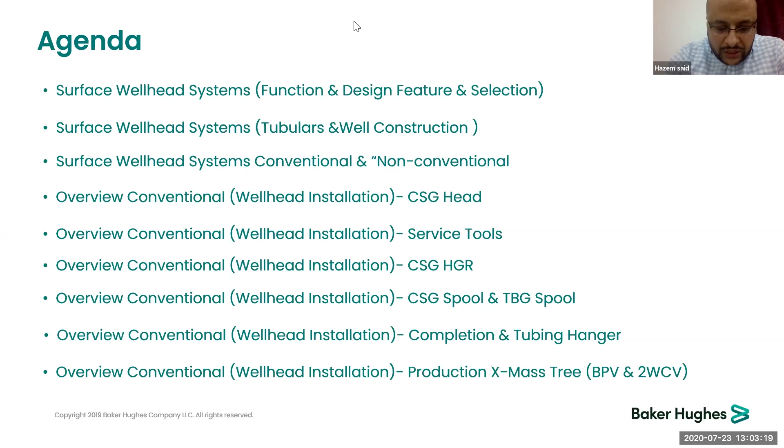So surface wellhead system function and design feature. What is surface pressure control, or what does surface wellhead mean? Or what does a surface wellhead look like? We have two main types of wellhead. We have something called surface wellhead, and we have another one called subsea wellhead. So the wellhead will be either on the surface or on the seabed.

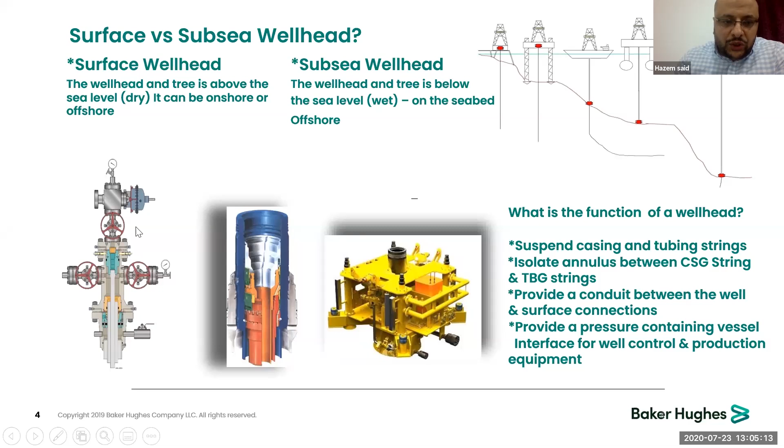What is the function of the surface wellhead? The function is to suspend the casing and provide a conduit for a surface connection, provide a pressure containing vessel for interface for control and production equipment. So this is the main function of your wellhead. This is like a door for your home. You will not be able to go inside your drilled well without passing through this wellhead. So it's your door for your home. So this is what we know about the surface wellhead.

How does this wellhead look like? The wellhead has design features. You will know this wellhead by its features. So the main design feature for a wellhead is whether it will be a flanged wellhead, like the one on the left-hand side, or a clamped connection like the one on the right-hand side. You will find a clamped wellhead part.

Whether we will find it's a slip hanger or mandrel hanger. The mandrel hanger is usually the one used in the multi-bowl wellhead. The slip type is the one used for the stacked wellhead. Even in some troubleshooting, we use this slip type hanger in the multi-bowl.

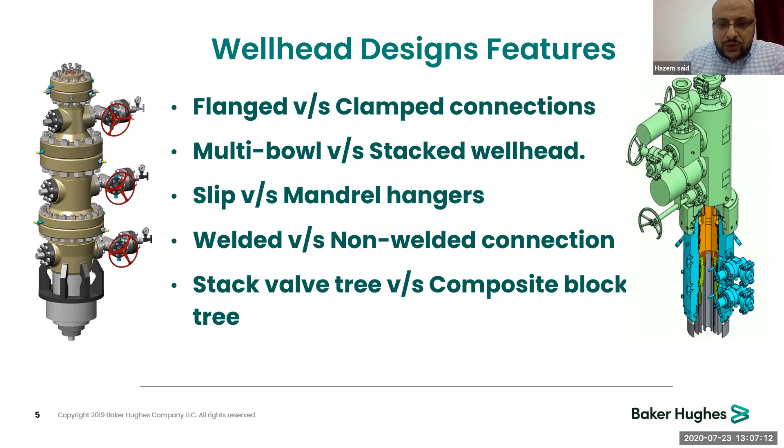So after the features, you need to understand one important thing: wellhead selection. On which basis do I need to choose my wellhead, or what criteria should I go through to decide the wellhead for my company or for a customer? The selection is based on a lot of aspects. First, the casing program, which the company puts to drill the well, is one of your important data to decide your wellhead selection.

What else? Weight and grade of this casing is very important to know while I choose my wellhead. Total length of each casing, so for how long I will drill each section of the well. The bit program, anticipated produced fluid. All of these aspects are very important while I choose my wellhead.

What else? Anticipated pore pressure. So each zone or each number of layers has a certain pore pressure. This also needs to be understood, so you know where your casing is, and that's why you will know the pressure rating for your wellhead. Is it 3K? Is it 5K? Is it 10K? And so on.

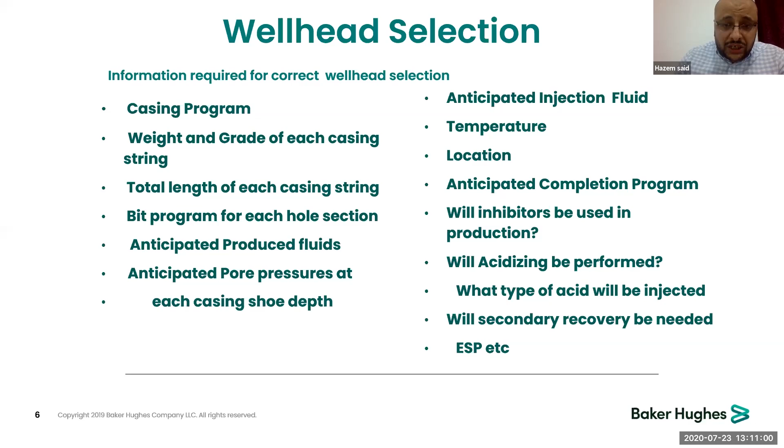My wellhead stays installed because it will last for a long time period on the well while you are producing. Also, I should anticipate: will I design my wellhead now for natural flow, then when I do the recovery, I'll install ESP and so on. All of this I need to take into consideration in the selection of the wellhead. Okay. So what else do I need to understand here?

We will speak about tubulars and well construction. These are the main three tubulars used in the oil and gas industry. Understanding these three tubulars is very important for the surface wellhead industry. Why? Because they're associated with your wellhead: it is connected with this casing, or you run through this casing, or you seal around this casing.

Also, regarding the drill pipe, your running tool will be installed or retrieved by this drill pipe. So you need to understand the weight, grades, connections, and lengths you are dealing with, so you put your wellhead in the correct design from the beginning.

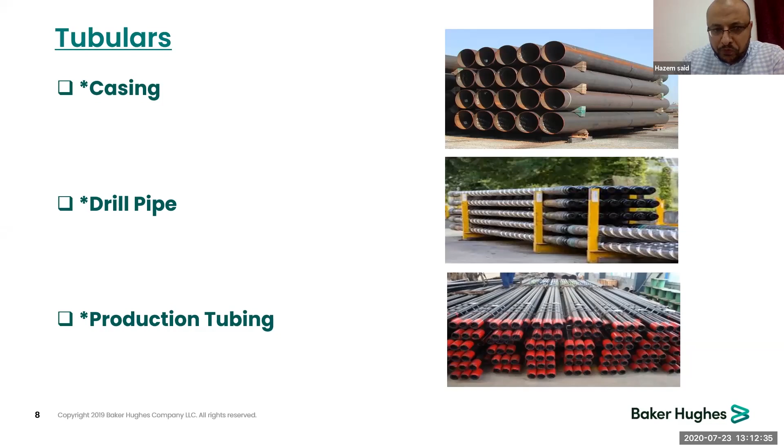And you need to understand this naming: conductor, surface casing, intermediate casing, and production casing. Okay, why? Because each part of this casing will be attached to one part of the wellhead. So surface casing will be connected with a part of the wellhead. Intermediate casing will be connected with another part of the wellhead. Production casing will be connected with another part of the wellhead.

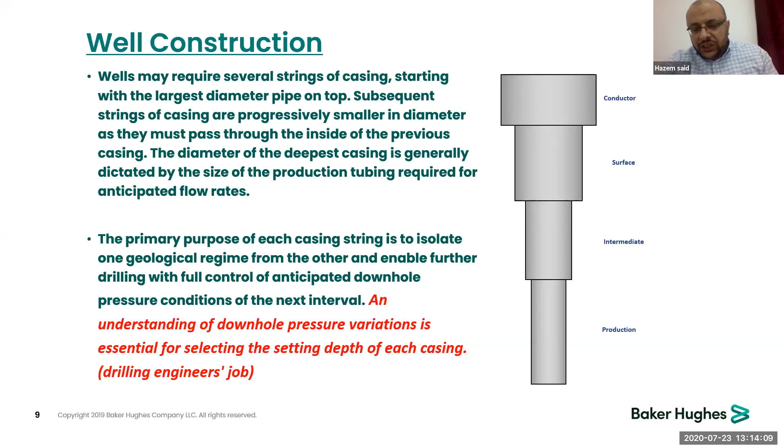And we will see how we are actually building the well through the wellhead through drilling phases, because we do our well in phases, as you know: surface, intermediate, production, and set our casing. In this stage, we are adding our wellhead parts to these parts of casing. That's why I mentioned it's very important to understand what casing you are dealing with, the weight, grades, types, material, all of this stuff, because it's very essential for the wellhead part.

In wellhead systems, you will hear about something called conventional wellhead and non-conventional wellhead. What does this mean? The conventional wellhead means it's a basic wellhead like you see on the left-hand side, okay? It means each part of the wellhead will accommodate one casing string. So this part called casing head housing will accommodate surface casing. This part called casing spool will accommodate intermediate casing. This tubing head spool will accommodate production casing, and so on.

While in a non-conventional wellhead, on the right-hand side, your wellhead part will accommodate two or more casings in one go, like this part. If we focus here, you see this part having two casings, the surface casing and the intermediate casing, in one go, in one shot. This is to stop manipulating the BOP, so you are not changing your BOP between each stage. And I will explain in the overview how this will look in the stacked conventional wellhead, rather than the multi-bowl or non-conventional wellhead.

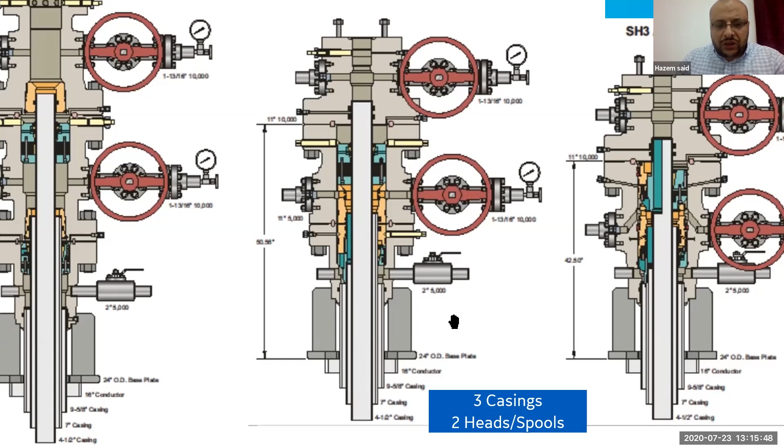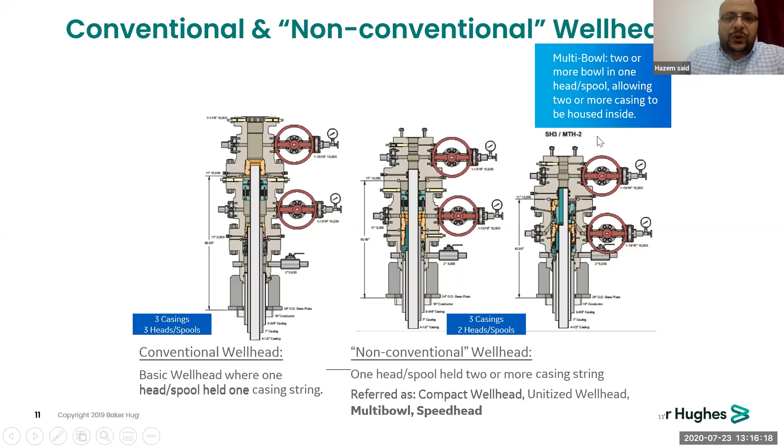So this is the main understanding of the multi-bowl wellhead. There are other names also in the wellhead or oil and gas industry. We name it multi-bowl, compact wellhead, unitized wellhead, speedhead. All of these names are known as multi-bowl wellhead, or non-conventional wellhead.

So the conventional wellhead consists of these parts. This is the one which is usually installed in the majority of oil and gas companies. This is the old style. It started with the beginning of the oil and gas industry, and it still exists in a lot of countries. And it's very suitable for oil wells or low-cost wells, because multi-bowl is usually an expensive wellhead.

So what are the parts of this wellhead? We have the casing head, the casing hanger will be inside here, the casing spool, this is the second part. The secondary seal is internal here in the casing spool. The tubing head spool is the last part here on the top. You have a single tubing hanger or dual tubing hanger based on how many pay zones you have. As I mentioned, you need to anticipate the drilling program, and some associated service tools.

These are the main parts which we have in conventional wellhead styles, which you have everywhere, and it's usually flange to flange, as you see. These parts here are called flange to flange, a flanged wellhead as well.

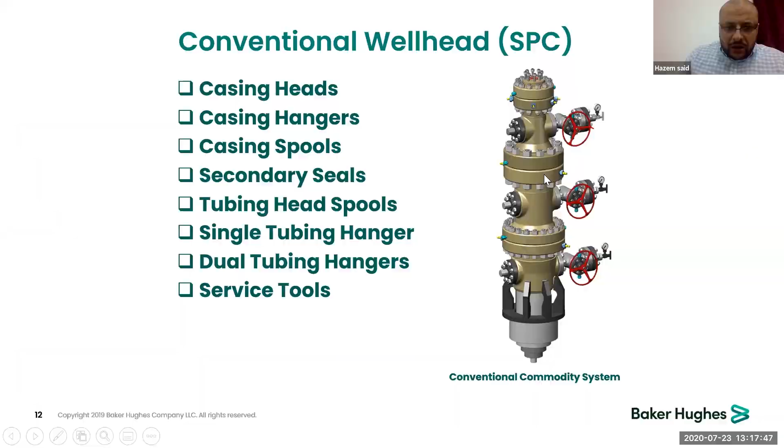So now we will go through an overview of conventional wellhead and wellhead installation. We will start with the first part, which is the casing head, and this is the name of it.

So where will my casing head be installed? As you see here, you start your well by digging the cellar, the one outside here. Usually your wellhead is similar to this: your main wellhead part will be down the cellar, and the Christmas tree at ground level. This allows the operator easy access to the Christmas tree to operate production, rather than doing the wellhead here on this ground.

On the ground, it would not be easy for the operator to operate the Christmas tree and the production valves and all of this stuff. That's why all of this is important. You can consider the cellar's function is to accommodate all the parts of the wellhead before you install the Christmas tree. This Christmas tree is the most famous part of the wellhead, and this is what the majority of people in oil and gas know about wellheads. They only know about the Christmas tree. They don't know what this part inside, down the ground level, is, because it's not noticeable at all.

So how did we start our well? As we mentioned, we run our conductor pipe and install it into the ground. How is it installed? Usually it's drivable, so it's hammered - we hammer this casing or conductor into the ground until something called the refusal point. When this conductor reaches the refusal point, I'll stop, and I'll continue drilling my well and continue installing my next part of the wellhead.

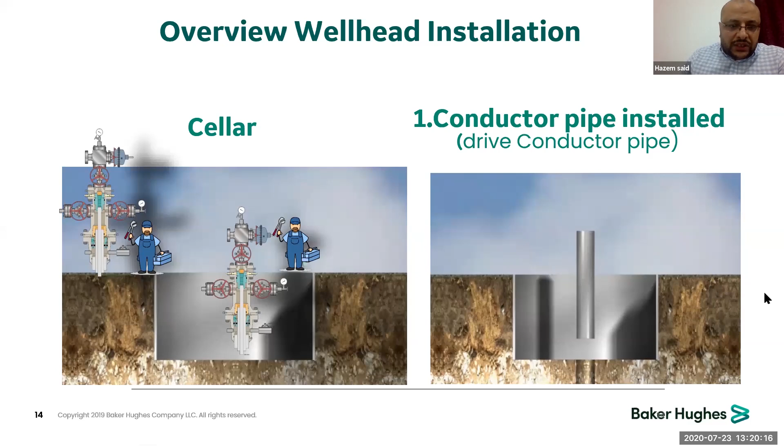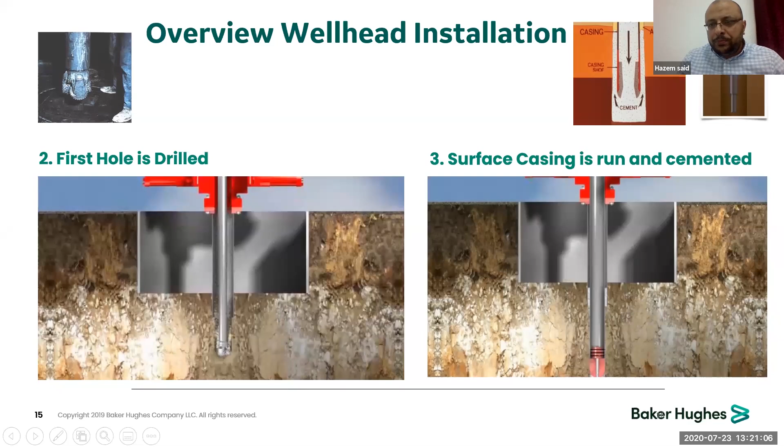We install the surface casing, then we do a cement job. Once you cement your casing, you will remove this BOP. As you see here on top, this is the conductor, this is the surface casing - it's blue, the conductor casing.

Once we finish drilling and cementing, we will cut the casing and install the first part of the wellhead. This cutting and arrangement actually has some mathematical parts and some arrangement with the rig side and the customer side. This is usually installed by field operations or a specialist for wellheads, with arrangements to make sure this part of the wellhead is installed properly, and there are some techniques while we are installing this.

So once we cut the surface casing, we install the first part of the wellhead, which is called the casing head housing. There are other names for this casing head housing in the industry - it's called starting head, Braden head, or section A. These are names that, when you hear them, mean it's the first part of the wellhead.

Don't confuse the wellhead - it's all the parts below. Which section are we speaking about? If we're speaking about section A, we're speaking about this part, which is the casing head housing. The function of this casing head housing - and this is, by the way, the real casing head housing on the right-hand side - it usually has a side outlet like here, because you need access to this annulus to monitor the well and make sure it's sealing properly.

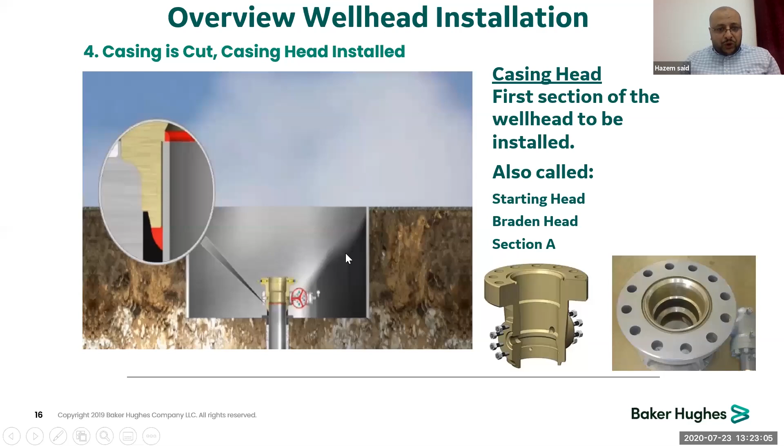But how do we attach or connect this casing head housing with the casing after we finish the surface casing? This wellhead is installed after the cement, because you are securing your well with this cement and removing your BOP to be able to install this part. So we have different types of attaching or connecting this casing head housing with the casing - whether it will be welded, so you have slip-on weld, SOW. Also, there is something called slip-on weld with O-ring in some cases, but the majority welds this wellhead to the casing.

This is how it's installed. You weld this casing wellhead to the casing, or in some other application, you connect this wellhead by threaded connection, as you see here. So this is a different application rather than the threaded part, okay?

What else? We have some other application called connectors, or slip lock, or sure lock, okay? You have a certain locking mechanism like you see here. There's a kind of segment, Allen keys and this stuff to connect this casing head housing with the casing.

So there are three main styles. One, slip-on weld, so I'll weld the casing head to the casing, or I thread the casing head housing with the casing connections, or I cut the casing and it will be connected with another certain mechanism like slips, okay? Some segment will go around this casing and attach onto it, and there will be a certain Allen key or certain stud engaged here, so it will be connected.

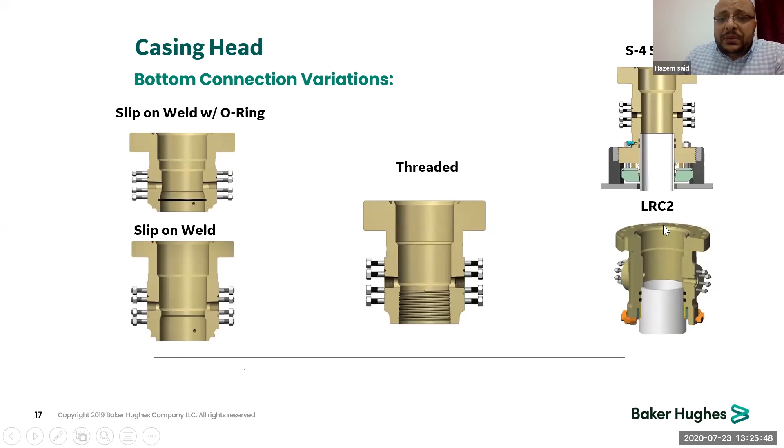It will be latch lock. You will not use any heat or any kind of thermal welding in this style or in this style.

Once we install this part, we are running, we will need to return to continue our drilling phases. We weld our well and we weld our wellhead. So you're changing now the phase. You need to put the part of wellhead which will be attached. So how does this become? You will return back the BOP onto your casing head housing, and you need to check the integrity of this BOP.

How do you check this integrity of the BOP? You need to test the rams, shear rams, pipe rams, and this stuff. So there is a service tool called a test plug, as you see here.

This test plug will sit into your wellhead. So it means my wellhead will be having the place where the test plug will sit, so I can test this BOP, so I can continue the drilling. I make sure the integrity of this wellhead and BOP while drilling, so my drilling will be secure. There is no safety issue or well control issue and so on.

So once we test this, we will need to install something called a wear bushing. It comes from its name. The wear bushing is used to secure this part of the casing head housing until you install the next phase, because we will install some part inside here. So how do we install this wear bushing?

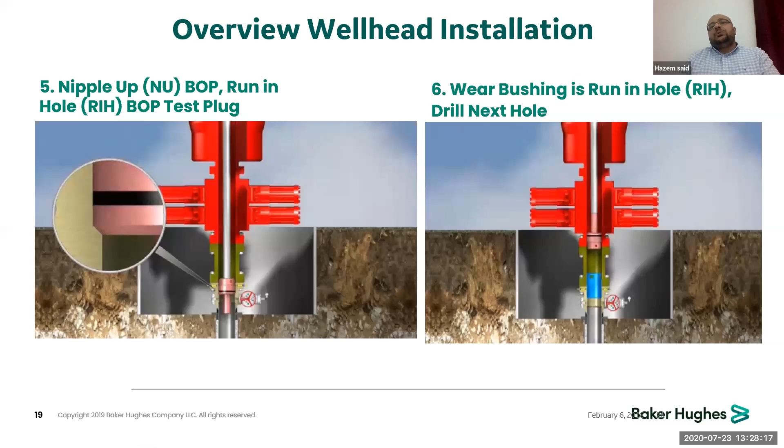Here you see how this test plug looks like. So your test plug has a drill pipe connection usually, and that's why I'm telling you in the beginning, this is the main tubular, one of the tubulars which you need to understand, because when you're designing this BOP or this test plug, it will be connected to the drill pipe. It will be run here into the casing housing by drill pipe.

That's why you need to know what drill pipe is available. You will need a crossover, you will need different connections, how it will be connected, how it will be installed, how it will be retrieved, and so on. That's why it's very, very important. Where it will sit, again, it will sit here. There will be a shoulder, usually in the majority of manufacturers 45 degrees, to make this test plug set in place.

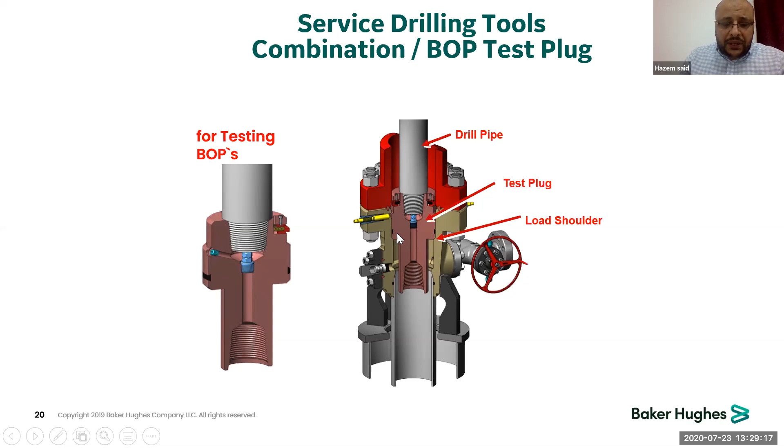This is one style, by the way. There are many styles of this wear bushing based on the manufacturer. In the industry, we have many manufacturers: Baker Hughes, Schlumberger, Halliburton, FMC, many manufacturers for this. So the methodology is the same. You have a test plug, you have a wear bushing, and regardless of the mechanism to install this, it will exist everywhere.

You need to secure this part while you are drilling the next phase. This is how it looks like in reality. This is, for example, the seals, which will make a seal while you are testing your BOP, and this is the wear bushing itself. This one needs to make sure it's compatible with each other. Each manufacturer has his own dimensions and sizes for this test plug and wear bushing.

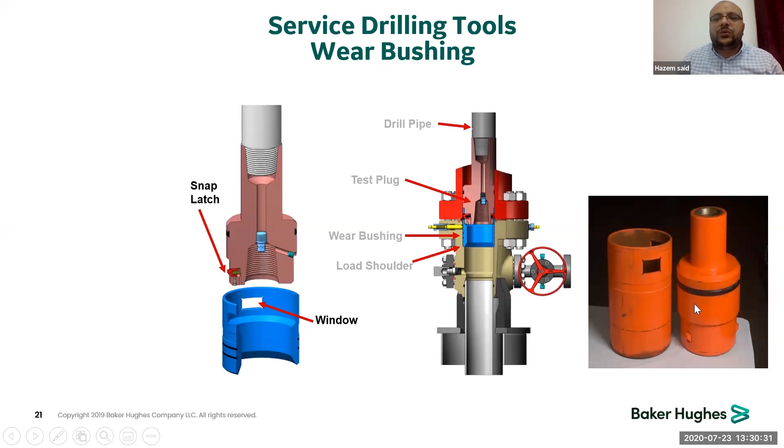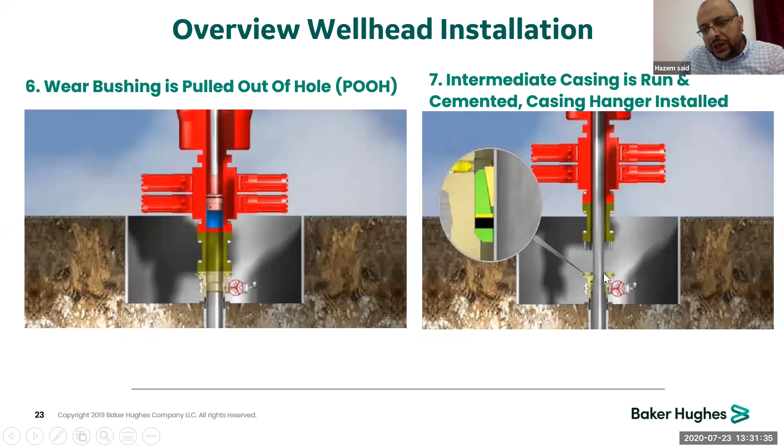How do we install this casing hanger? Usually we hang the BOP like you see here, hang only the BOP, and we put this casing hanger from below. It's open for two sides, as you see here. So you can open it two sides, and this is the usual standard in the majority of manufacturers. So whether it opens in two sides like here, and then you connect it with a certain mechanism, or it opens hinged because it will be wrapped around the casing.

So what is the function of this casing hanger? It will support the casing weight, not the total casing weight, because the main supporter of your casing weight will be the cement. You are installing this casing hanger after the cement operation. After you drill, you run the casing, you cement your casing. So this cement will seal your annulus, it will also accommodate the weight of the casing, the main supporter of the casing weight, and then you install your casing hanger part.

So what are the main purposes of the casing hanger? It's support, seal, center. These are the main three aspects: support, seal, center. It will support the casing weight. It will seal the annulus between the supported string and the previous string. So each stage I install, it will make this sealing mechanism inside the wellhead. What else? Center the casing, because you usually want your casing centered in the well. You put the casing hanger to center it, and so on.

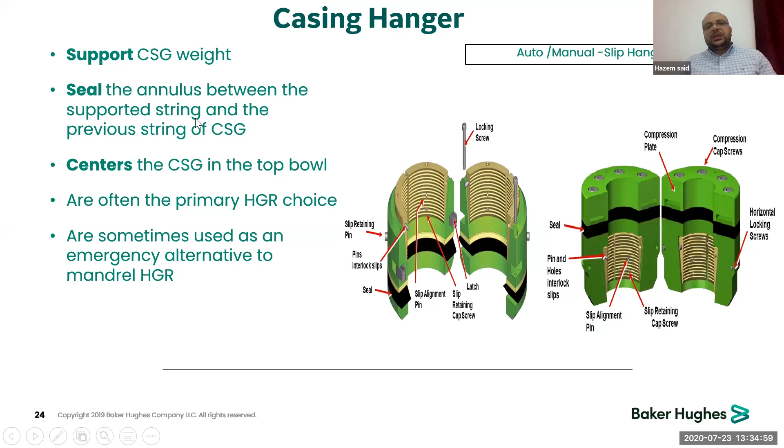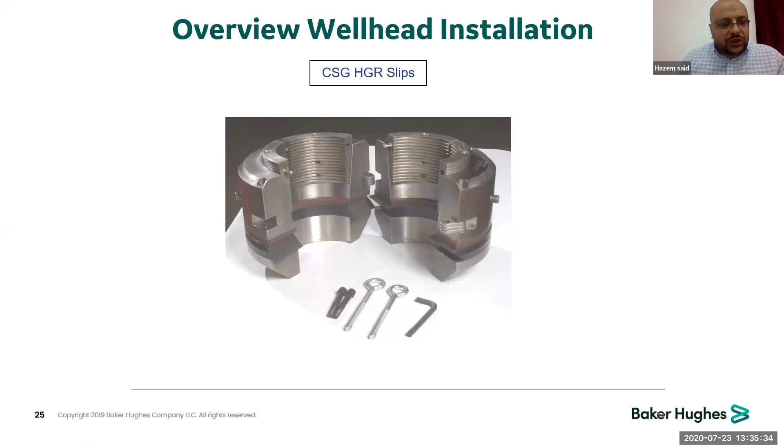This is called segment. This is the bowl. This is for lifting, and this is called the Allen key to open and close this kind of casing hanger around, and install it wrapped around your casing. Right. What else? We will take casing spool and tubing spool. Okay, so we will start first speaking about casing spool.

So once we install our intermediate casing, we will install our casing hanger, and we will come to section B, usually called section B, and it is not a must to install this casing spool. In some applications, in shallow depths, the well will only consist of casing head and tubing spool. So whether your well is 3 stages or 4 stages depends on how deep you are drilling. So whatever we are seeing now is a pretty standard application.

You have conductor, we have surface casing connected to the casing head. We now have intermediate casing connecting with the casing spool, as you see here, after you install your casing hanger. So this is your second phase. So once we install the casing hanger, this one installed here, we will make a connection here. So you will connect this casing spool with this casing head, and it will make a seal here.

How will it make a seal? It will make a seal with this part called secondary seal. So any type of casing spool, or even tubing spool as we will see, has a kind of sealing mechanism here in its bottom, not like the casing head housing, if you remember, which is the first section.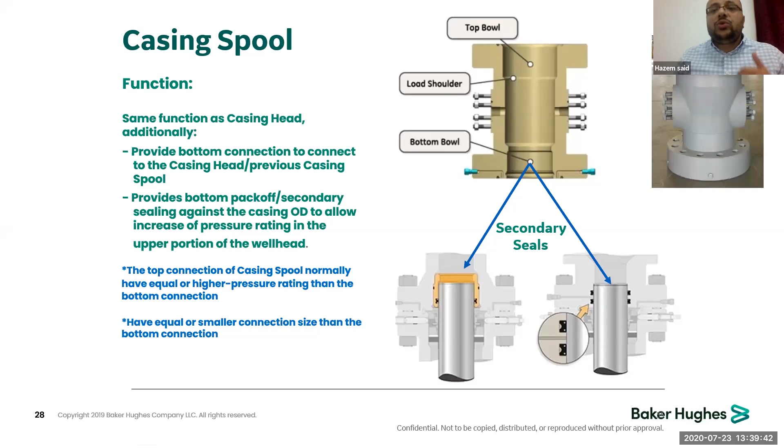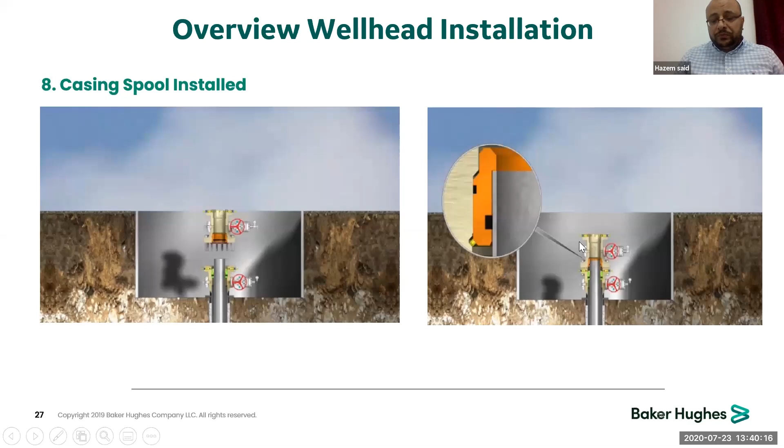What else do you need? We will cover it. Now we install the casing spool, so we will repeat what we did for the casing head housing, because we now need to drill again for the new phase, to go deeper to install the production casing. So what will I need to do? Because I removed the BOP, as you see here, to install this one, I return back the BOP to drill. When I return back this BOP, I need to do similar to what I did for the casing head housing. I need to test.

I need to run the wear bushing. Okay, similarly. So again, test plug to test the integrity of BOP. Wear bushing to secure this part until I install the next phase, or until I run the next phase.

Okay. So when you put the BOP here, maybe the BOP has become a higher rating because you go deeper. So you're using 10K BOP, now you are using 15K or whatsoever. Okay, you need to understand this, because usually you put an adapter between the BOP and your wellhead to connect them.

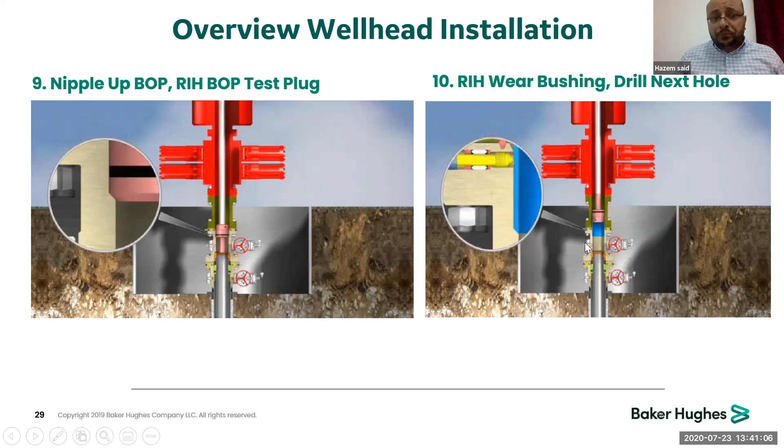So now we put our wear bushing. So we go to drill, install the production casing, cement the casing, and install the next phase, as you see here on the top part in this photo. This is conductor, this is surface casing, this is intermediate casing, this is production casing. This is how it goes while you are in the well. And each one of these is attached on the top with your wellhead part, as you know.

So now we reach this one, production casing. Okay, how will we install it? Similarly, we put the casing hanger. So we are hanging the BOP here, install the casing hanger again, and run similarly to install the tubing head spool. Once you install your casing hanger, you put the weight of the casing, you cut the casing, you install this tubing head spool similar to the casing head spool.

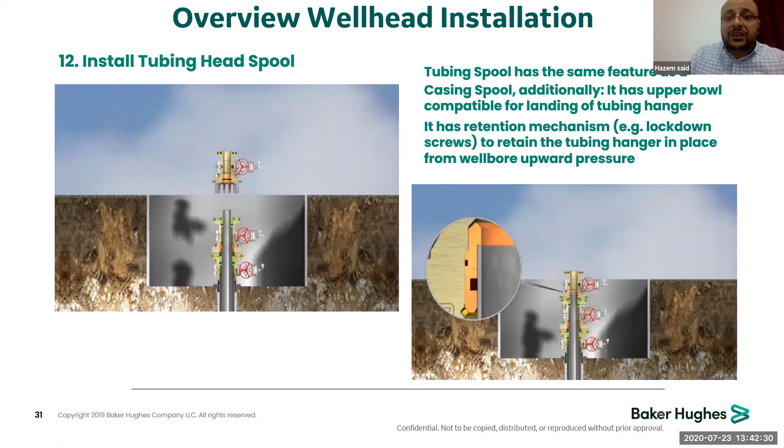How do I identify between the tubing head spool and casing head spool? Because it's a pretty similar mechanism or pretty similar arrangement. However, the pressure rating is different, some features are different. The main different feature here in the majority of applications now is something called the lockdown screw. You will find it here. Okay, this is from reality.

This is a casing cut, this is a casing spool, this is you installing your tubing spool, this is the valve, this is how you install it, this is called the stud, and this part will be installed here. And as you see here, in the bottom also there is a sealing mechanism for the tubing spool, similar to the casing spool. Different sealing mechanisms; what you see here is not a standard one, it is one of the examples. But you identify the tubing head spool usually by this lockdown screw.

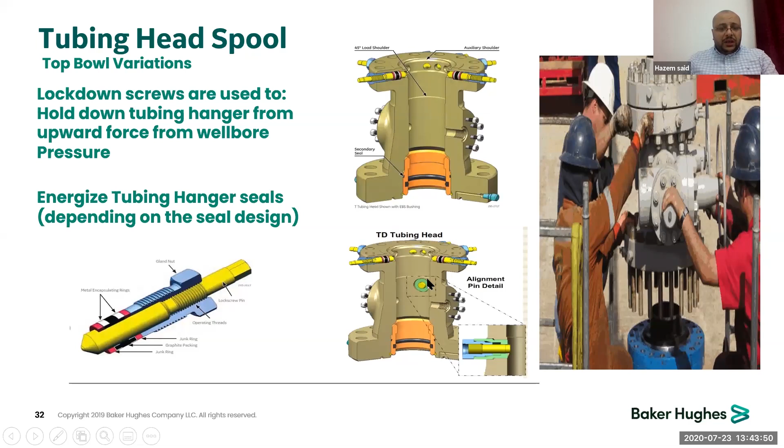And with some new technology now, there is something called the internal latch, where we are not using this type of lockdown screw, but this will be another topic we are not covering here. So tubing spool, whether we are installing the standard tubing spool or the tubing spool for dual completion. Okay, you are installing your tubing hanger in this area. So whether your tubing spool will accommodate one tubing hanger or dual tubing hanger, how this will look, I'll show you in the next slide.

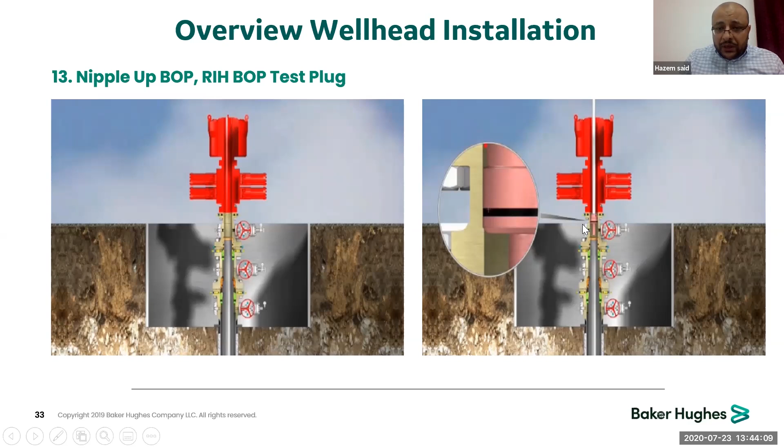So once you install your tubing head spool, you need to do similarly what we do: we return the BOP so we can install the completion phase. So we return back the BOP and we test the BOP, wear bushing, secure the well, and go to completion and tubing hanger. And this is how it looks.

So before we install the completion, we are removing the wear bushing, as you see here, and we install the completion assembly. We have many styles of completion. I saw that you are covering a lot of sessions about the completion in these webinars. So we have many different styles for this completion. It's not our topic today, but this is one of these as well.

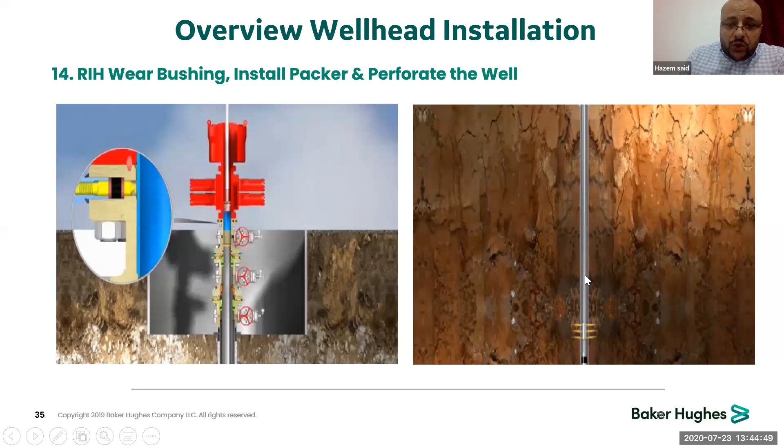So once we install the completion string, by the end of the completion string, we will connect our tubing hanger here. Okay, this is the one which will produce. This is the third tubular, if you remember, which we spoke about, which will be connected to our tubing hanger.

So once you have installed the tubing hanger, you almost finish your well. In some applications, the customer or production companies only run the tubing hanger and make a DST, or drill stem test, or other applications. They test the wells and do whatever they need without installing the Christmas tree. In other applications, they run the Christmas tree, and this is what we will see in the next slide.

For the customer who continues with installing a production Christmas tree, you will need to understand the next step. Once we finish installing the tubing hanger through the BOP, we need to remove or nipple down this BOP and install our Christmas tree. How will this happen? We need to lock or block the well. Although you put wireline plugs and all of this stuff through this tubing hanger, you need to run this kind of valve, called a back pressure valve.

What you see here is the standard one, called H type. There are many styles of back pressure valves: K plug, F plug, and different types, but this is the major standard one. You will find it in 90% of tubing hanger applications. That's why the majority of manufacturers make this thread here for this back pressure valve.

This back pressure valve is like a check valve, and it's in a closed position, as you see, because we install it to close here so we can nipple down the BOP and put our Christmas tree, or production tree, here. This back pressure valve has a part called a poppet, and once it has any pressure from top, it can open, but from bottom it won't open. So you still can inject fluid into the well while you are installing this back pressure valve.

After you install the back pressure valve, in some applications you use something called a two-way check valve, which is a kind of plug, like you see here. It's similar to the back pressure valve; however, this is a plug. It doesn't allow pressure or fluid from either top or below.

So it's like a plug. Why are we using it? Mainly to test the Christmas tree, to make sure of its integrity, that all the valves are in good condition and can withstand the pressure and so on. Okay, this is the main application of the back pressure valve and/or two-way check valve.

In this way. So from where are we installing? From here, from the Christmas tree. So while we are speaking about the Christmas tree, what does this Christmas tree look like? This is the main part of the Christmas tree, or production Christmas tree. We have two main designs, whether it will be stacked valves, as you see here on this photo, connected with the wellhead, and this here is your wellhead.

But in this style here, you see the tubing head, your tree is above ground level. That's why there is a ladder here, so the operator can operate this one. In another application, this one again, as we mentioned, will be down here. So you only see your Christmas tree.

What you see here on the left side is also a Christmas tree, but it's called a solid block or composite block tree. The main difference between this tree and this tree is that in this tree the valve is integrated in one body, like you see here. Okay, it's not separate valves like you see here. This is a valve connected with different flanges. Okay, no, this here is the valve inside.

So this solid block or composite block Christmas tree is used for gas wells, for high pressure applications, and usually it's more costly than the stacked valve trees. Okay. So this is higher cost than this one. So once you install this one, that's it, congratulations, your well is completed.

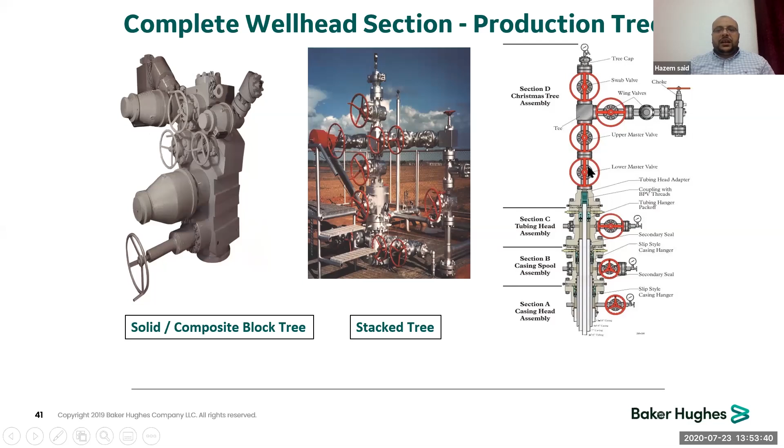Okay. This is not a standard. Again, it depends on what the customer or operator company provides: Aramco, ADNOC, ENI, whoever. Okay, in some applications you will find two valves, like you see here. Here is a valve, here is a valve, another valve. It depends. Okay, here is an actuator valve. Here it has a different arrangement, different style, different everything.

But I need you to understand the main parts of the Christmas tree. Any Christmas tree has the following: the tubing head adapter, which accommodates the tubing hanger. Okay, so the neck of your tubing hanger will be here. This tubing head adapter is sometimes also called the tubing bonnet. Some customers or some people in the industry call it bonnet as well. Okay, so they mean the same part.

But what you need to understand here, this lowest valve here is called the lower master valve, LMV. And here the upper master valve, which is your second valve, or the valve on top of the lower master valve, and this is your tee. Here you have the wing valve or production valve. In another application, you have another valve called the kill wing valve.

In another application, some customers put here an actuated valve, which uses another force to open or close this valve, and the choke, which regulates the production. And you have here the swab valve on top of your Christmas tree, and you have the tree cap. This tree cap, usually you open it and you install your back pressure valve or your two-way check valve to continue your operation.

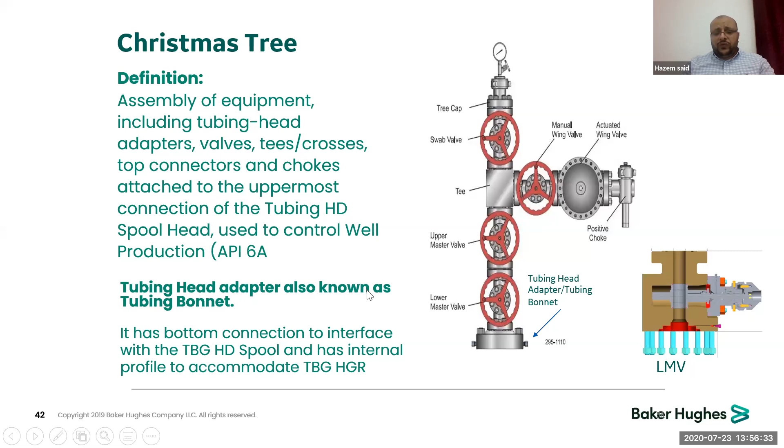This tree usually is following API 6A, means that there is a certain methodology or certain requirement or certain standard need to follow to make sure your Christmas tree or even all the wellhead is meeting this standard. Okay, for wellhead it's called 6A. You can Google it and go through API 6A. You will understand a lot what is the parts of wellhead moreover.

Okay, speaking about Christmas tree, you can't not speak about the gate valve, which is the main part of the Christmas tree itself. The valves which we are speaking about is called gate valve, where the motion of this valve is straight line motion, like you see here, 90 degrees, straight line motion. Okay, what is the function of this valve? So the gate valve used to stop the fluid completely or open completely.

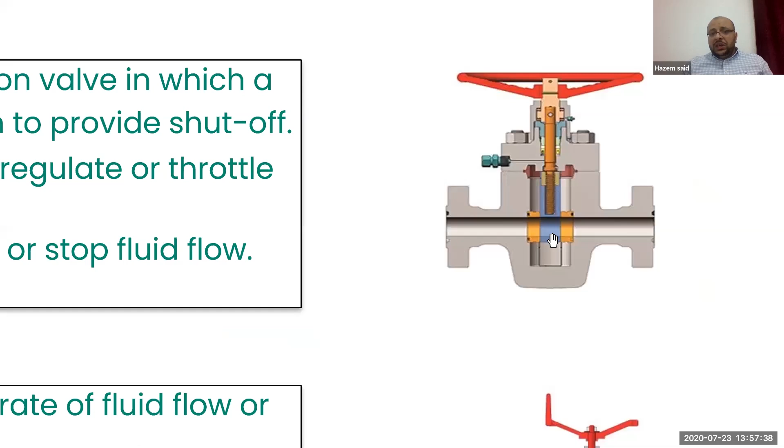You can't operate this valve on a partially open. It makes a wear in this part, the blue part, which is called gate. Okay, this part called gate. This part called seat, for example. This part, if you put it in halfway position, it will wear. So the gate valve mainly to open or close.

So how we control the fluid or how we control the production? By this kind of valve, chokes. Okay, so chokes, which is another part of our wellhead, as you see here. So you might use this choke only in the evaluation phases or in drilling phases to evaluate the fluid and production and all of this stuff. Okay, so this choke valve used to regulate or throttle the fluid.

There is two main type of these choke valves, which is positive or fixed chokes, where you are having here specific pins with a specific size to have your flow through it. Or adjustable choke, which usually you are having here a hand wheel to regulate the production when you are making the evaluation for the well. What is the optimum flow rate to produce? What is the minimum flow rate? You are using usually this kind of choke valve, which is called adjustable choke.

We will cover some other part, a quick part here called API flange. We see how our wellhead is connected. So we speak about flanged connection or section by section or stacked connection. So we can't speak about this without speaking about API ring joint gasket, or ring gasket. You have three main types of gaskets, which is R, BX, or RX. R and RX usually replacing each other, but BX not, because this fits in a different groove rather than R and RX, like we will see in the next slide.

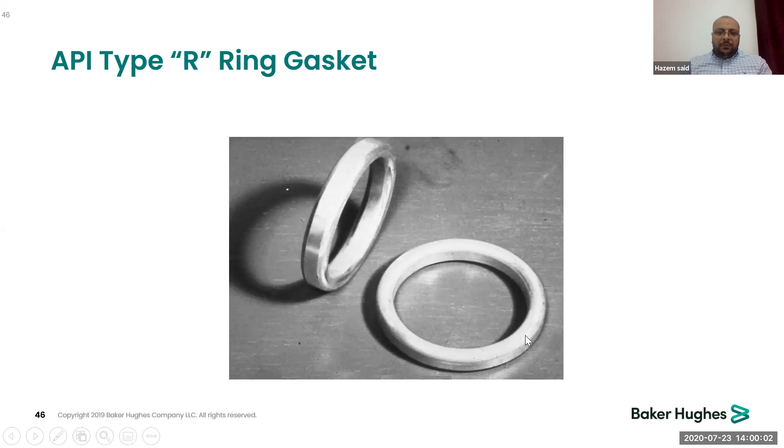So what is the R-ring gasket? The R-ring gasket, as you see here, it's like a rounded shape gasket. Okay, this is a metal gasket. What is the function of this metal gasket here? We mentioned we put a wellhead on a wellhead or a BOP on a wellhead or whatsoever. How is this connected? How does this make seals? It's metal part here and metal part here. There is a certain mechanism to seal these two flanges. You have this kind of metal gasket to put in a certain groove here.

And then with a certain torque for this stud and nuts, this is called the stud and this is called nuts. You are torquing this stud to a certain torque, giving a certain force, and when it takes the required force, this R gasket will be crushed, because this kind of gasket is a crushing one, and it will make a seal. Usually you will find a small gap between the two flanges. And your gasket will make a seal into your groove for the wellhead, okay?

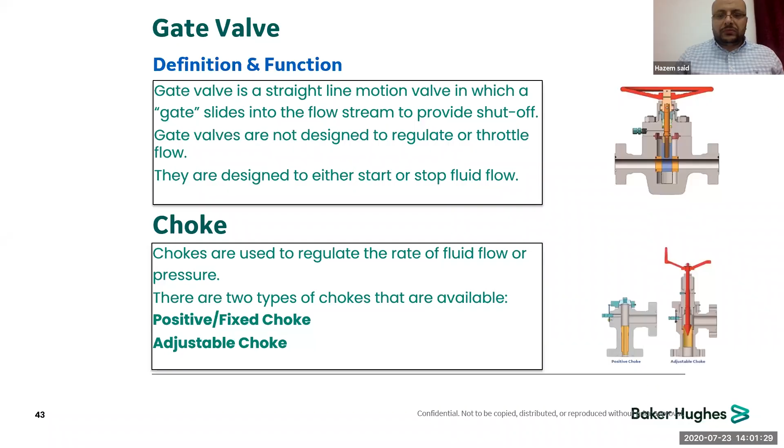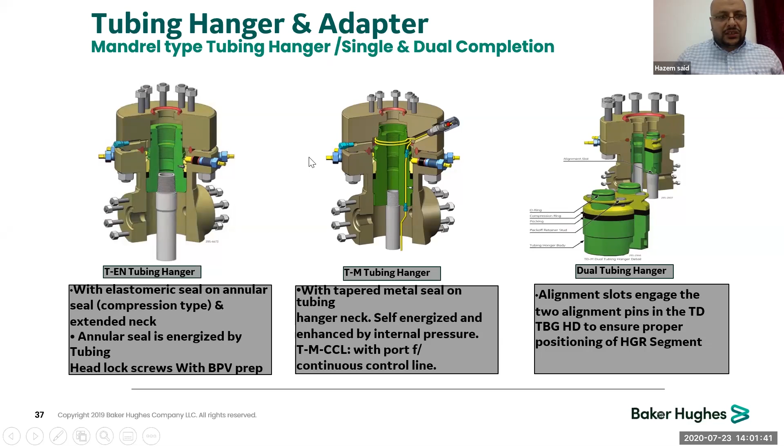If you remember, here, this is a gasket, for example. This is a gasket. This is a gasket. All flanges, even if we're having a BOP here, when you connect this with this here, you're having a gasket as well. So the understanding of this gasket is very important.

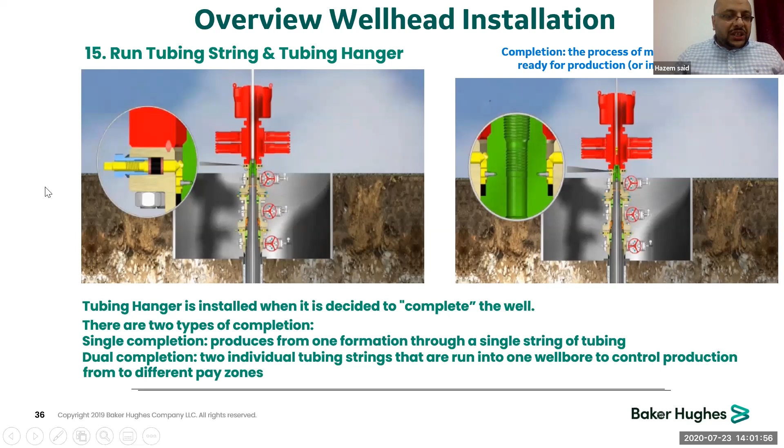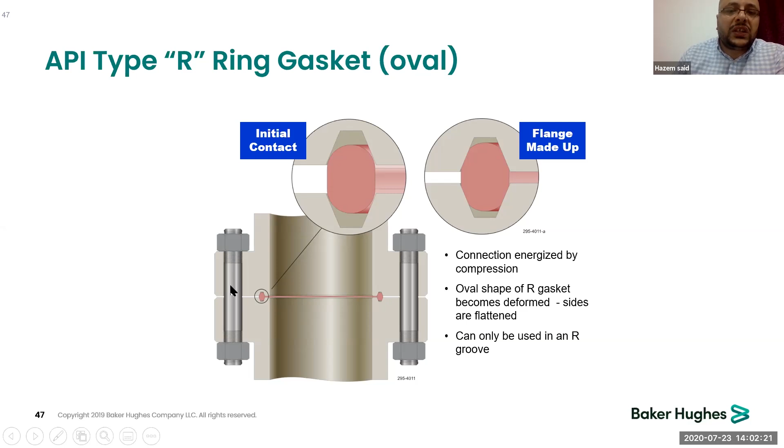So R and RX go for the groove called 6B. Both are replaceable - you can install R or RX. RX usually has a higher gap rather than R. Both of them are usually used for low application pressure, 5K and so on, and it goes for 6B flanges. This is an API standard, by the way, not something for a manufacturer to design. It follows the API standards.

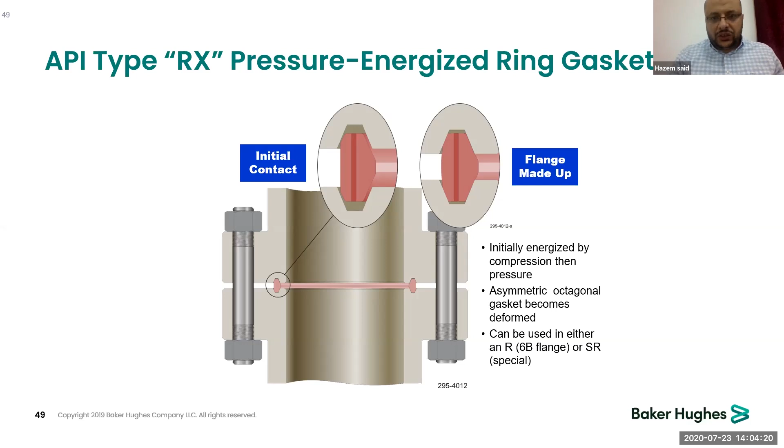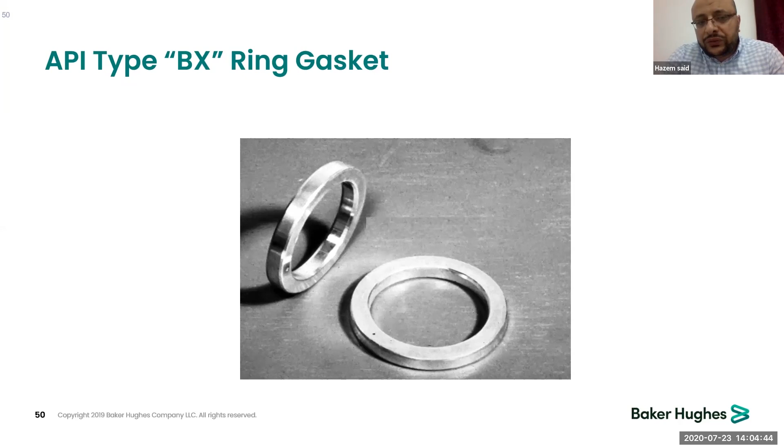What else? The last type of gasket is the BX ring gasket, and it's like a flat gasket, as you see here. It has a rectangle cross section. It usually has a hole to vent the pressure, because this kind of BX gasket is made for something called face-to-face seal. There is no gap between the flange, as you see here. There is no gap.

Once you install it, it's similar to the RX. Once you install and give a torque for the studs and nuts, it will be compressed or crushed, but also pressure energized. But it's not replacing the other two because the groove is different - it's called 6BX, not 6B for R and RX. Also, once you pressurize your wellhead or connection, it will make an additional seal because it's pressure energized by that.

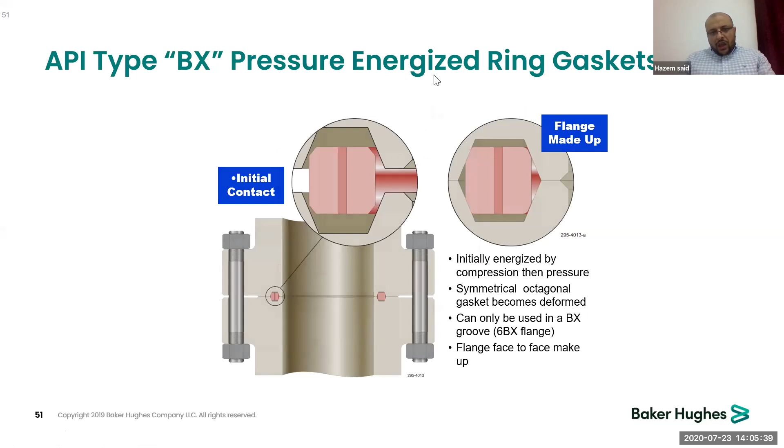So this is how it will look when connecting any two connections, with your studs at a certain torque. Here you have R or RX, which run in 6B and are rated for 5K. Here, BX is rated for 20K, making face-to-face sealing rated to 20K. And it makes a face-to-face seal here, so you will not be able to see the gasket itself between the two flanges. You still can see the R or RX, but you can't see the BX because of the different groove.